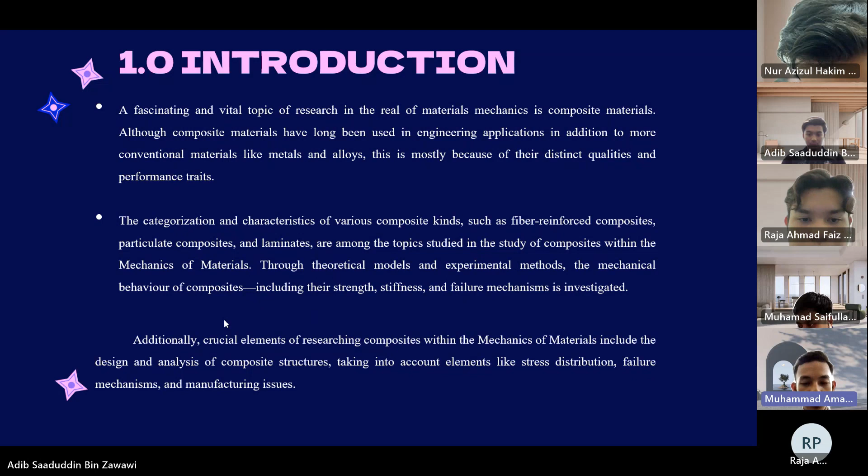Okay, next about importance of composite. Composite material have gained importance in the field of construction of various structures. Numerous benefits of the material, especially strength to weight ratio, meaning they can provide significant strength and stiffness while being lightweight.

Number two, durability and corrosion resistance, which is composite material are highly resistant to environmental degradation, including corrosion, which is a major concern for traditional material like steel. Number three, design flexibility, which is composite material offer a higher degree of design flexibility, allowing engineers to create complex shapes and structures that are not easily achievable with conventional material.

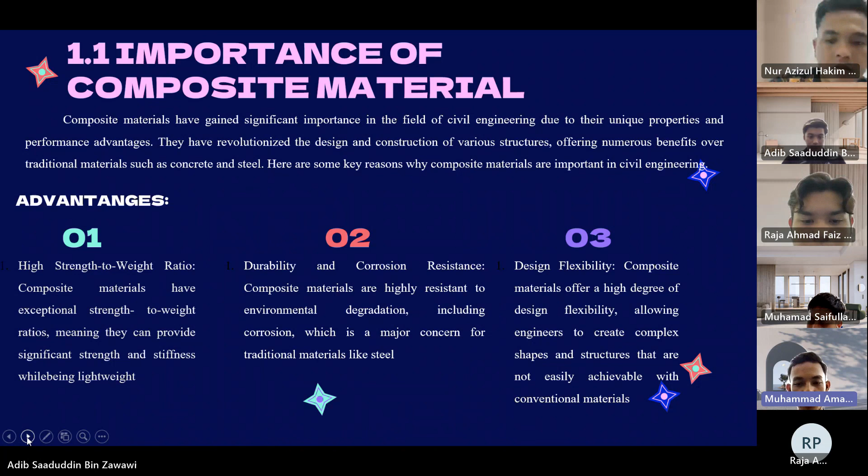For application of composite material in civil engineering, composite materials are revolutionizing the design and construction of structures, offering enhanced strength, durability, and a number of other benefits. This essay explores the diverse application of composite material in civil engineering, highlighting their contribution to the industry.

So number one, reinforced concrete structure. One of the primary applications of composite material in civil engineering is in the reinforcement of concrete structures. Number two, bridge construction. Composite materials have found widespread use in construction of bridges. CFRP composites are employed to strengthen and rehabilitate existing concrete or steel bridges, effectively increasing their load carrying capacity and extending their service life.

So number three, noise barrier wall. Composite material including polymer-based composite and cementitious composite are used in the construction of noise barrier walls along highways and railways. This material offers excellent sound insulation properties, durability, and resistance to the weather.

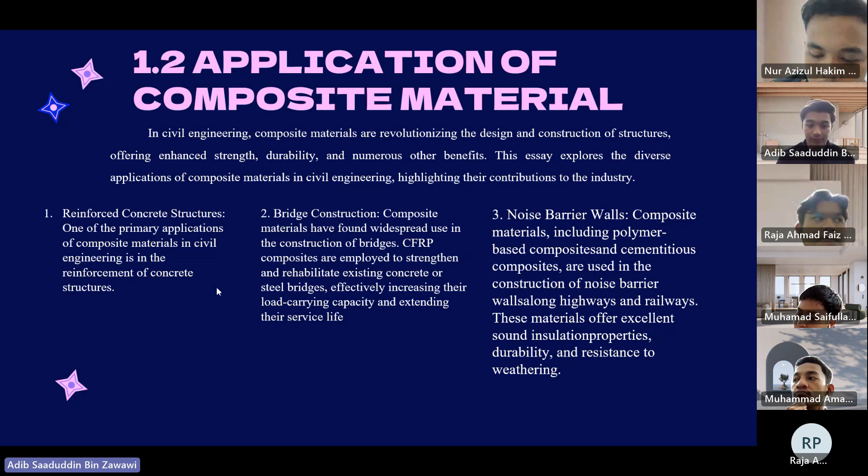Okay, so for the problem statement: design and fabricate a composite plate using any recycled material comprising more than 8 ply or 8 layers, as the term composite material describes. The composite plate should comprise more than 2 types of material, any material ranging from wood piece, natural fiber, used cloth. Thickness of the composite plate should not be larger than 2 mm.

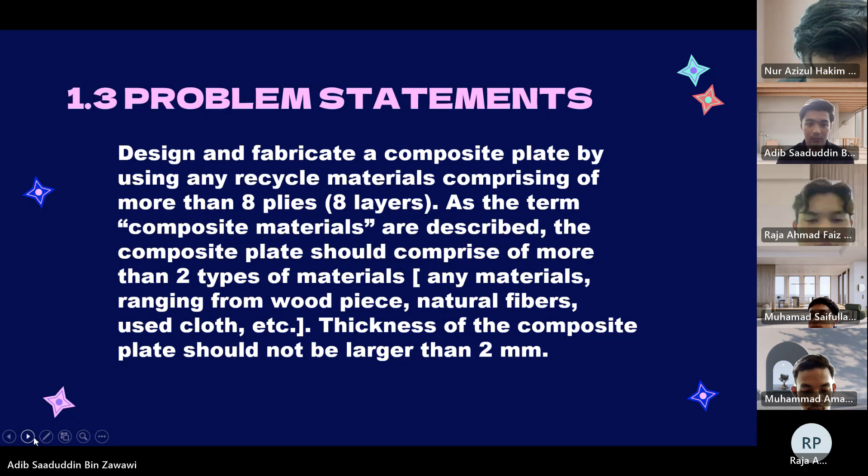Okay, for the methodology, first we use aluminium as the first material, a chemical element with atomic number 13 and symbol Al. Aluminium belongs to the boron group. By weight, it makes up around 8% of the solid surface of the earth. Because of how chemically reactive aluminium metal is, natural examples are uncommon and only found in extreme reducing settings. Instead, it can be found in over 270 distinct minerals in combination.

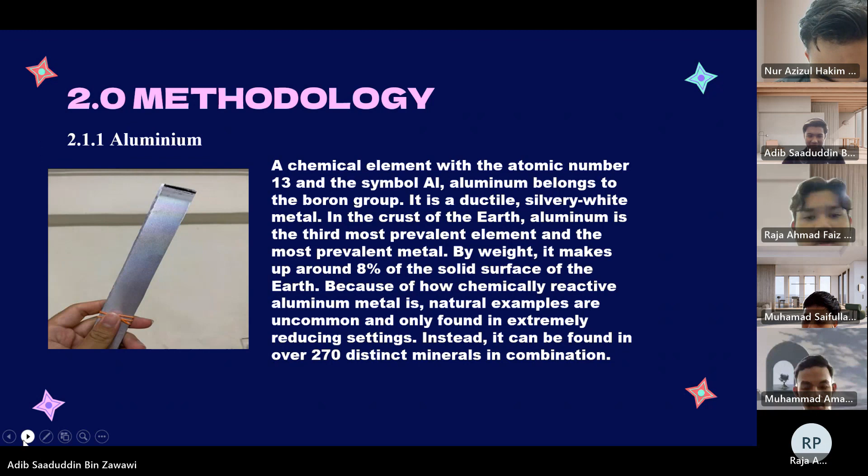For the second material, we use zinc, a metallic chemical element with symbol Zn and atomic number 30. Spelter is another name for zinc used in trade. Additionally, zinc and magnesium are chemically related in various ways. Zinc, on the other hand, gives good corrosion resistance, particularly against rain. Zinc has similar stiffness and elastic modulus properties as other die-castable materials.

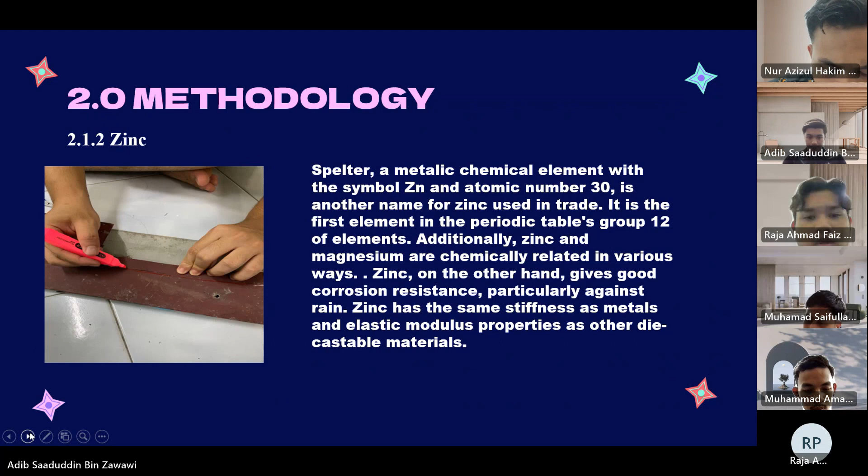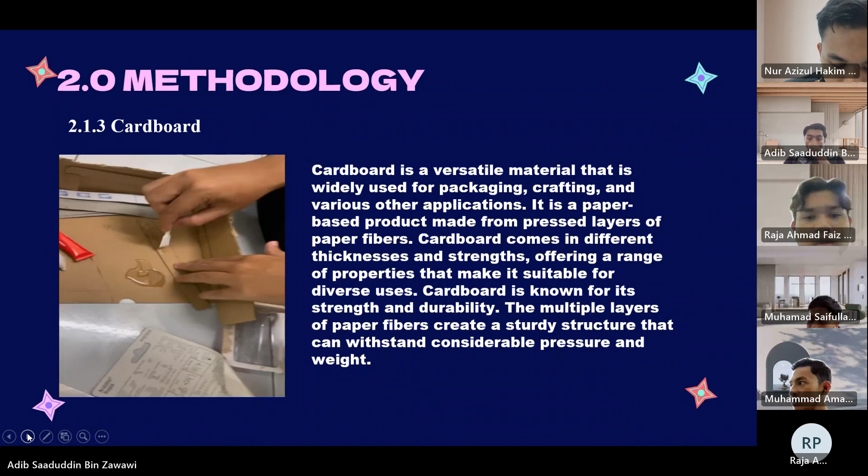For the third material, we use cardboard. Cardboard is a versatile material that is widely used for packaging, crafting, and various other applications. It is a paper-based product made from pressed layers of paper fiber. Cardboard is known for its strength and durability. The multiple layers of paper fiber create a sturdy structure that can withstand considerable pressure and weight.

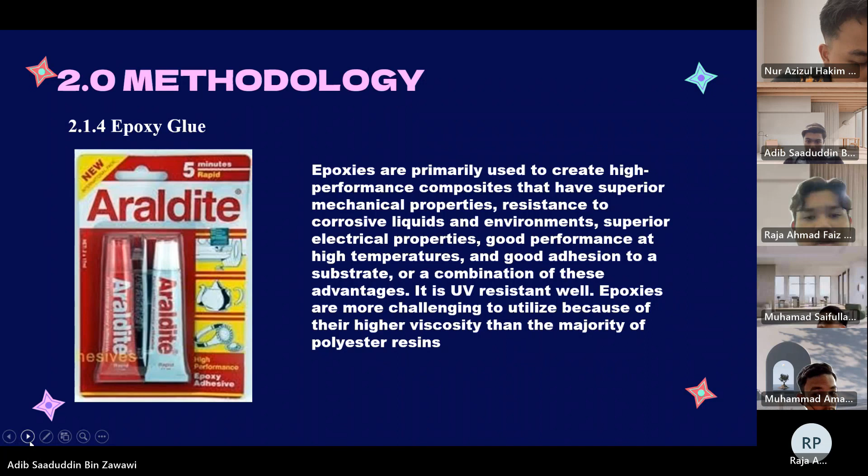For the epoxy glue, epoxies are primarily used to create high-performance composites that have superior mechanical properties, resistance to corrosive liquids and environments, superior electrical properties, good performance at high temperatures, and good adhesion to substrate, or a combination of these advantages. Epoxies are more challenging to utilize because of their higher viscosity than the majority of polyester resin.

E modulus on stress and strain graph. Young modulus, also called elasticity modulus, is a measure of the elasticity or extension limit of a material. It is a mechanical property of solid and linear elastic solid materials.

Using Excel, the data from the laboratory will be inserted and the graph will be plotted. The value of the modulus of elasticity is determined by finding the slope of the curve using the linear equation Y equals mx plus c, where m equals slope.

Tensile specimen size according to ASTM D638. For the tensile test, the specimen size is length 20 cm, multiplied by width 2 cm, multiplied by thickness 2 cm.

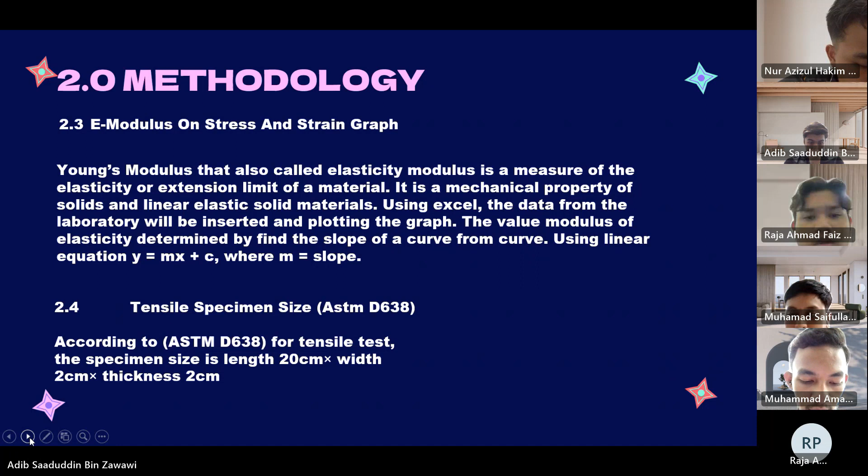For the tensile test procedure, the specimen was placed in the grip of the universal testing machine at a specified grip separation and pulled until failure. The steps for this testing are mentioned below.

First, the computer of the universal testing machine is switched on. Second, a new file is opened in the related software. Third, the specimen is locked tightly between the grips. Fourth, the control panel is set according to size and speed. Then the testing is started.

Fifth, the specimen is applied with an extensive load until the specimen fails. Finally, the result of the testing is recorded in the computer.

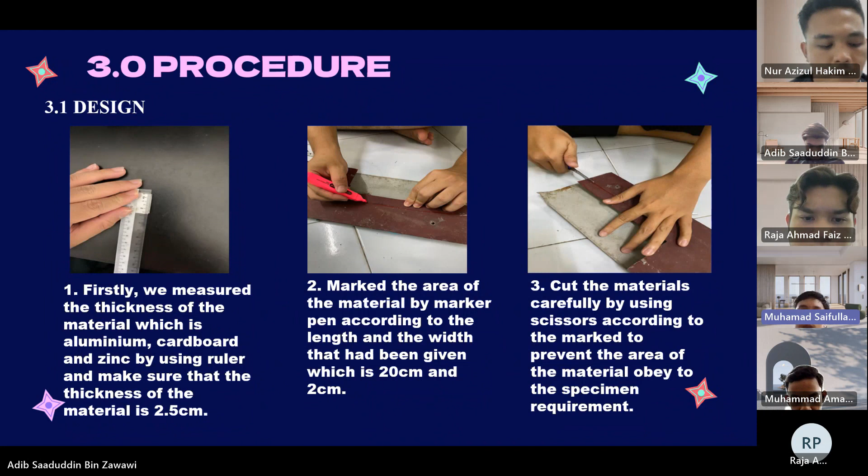For the procedure, first we must take the measure of all our items to make sure none of the layers measure more than 2.5 cm. Then we mark the area that we want to cut, which is 20 cm long and 2 cm wide, and then we cut the material using scissors.

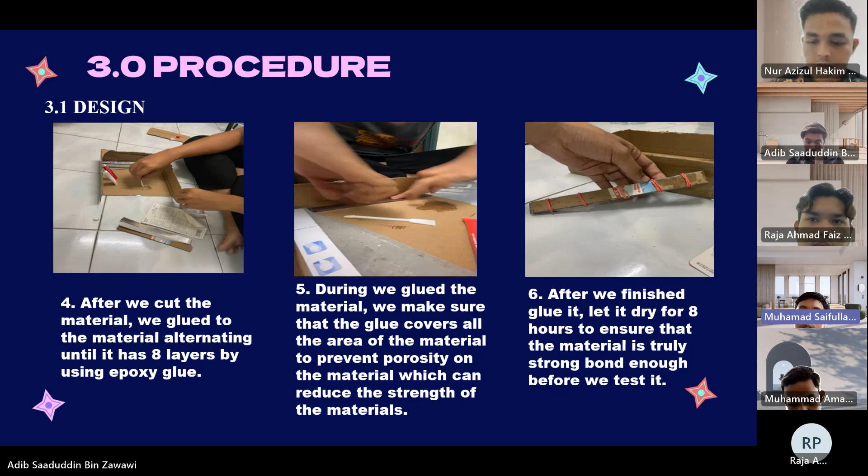Using the glue, we make sure all sides of the material are covered. After we finish, we let it dry to make sure the material forms a strong bond.

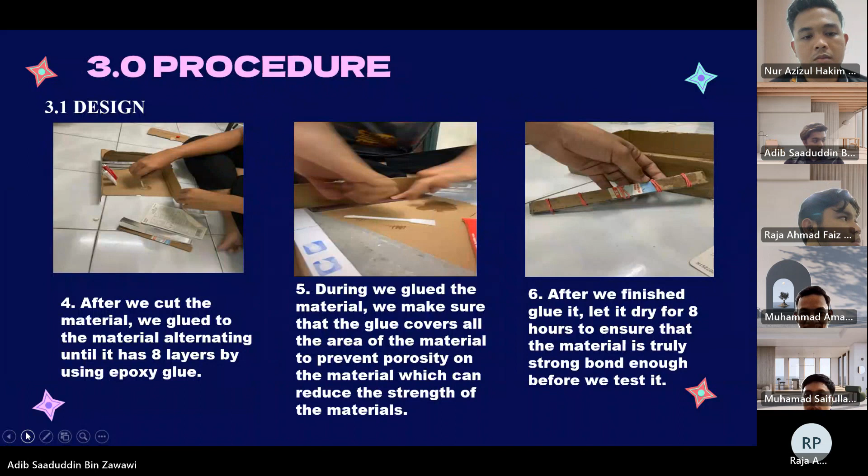Now I will continue with the discussion part of our project. By testing our composite plate in the laboratory, we can determine the elasticity value, the Y modulus, on the stress and strain graph by plotting the data into Excel.

We can simply determine the Y modulus by referring to the linear equation Y equals mx plus c, where we can determine the slope, meaning the m value is equal to the slope of the graph. So the slope is also the value of the Y modulus.

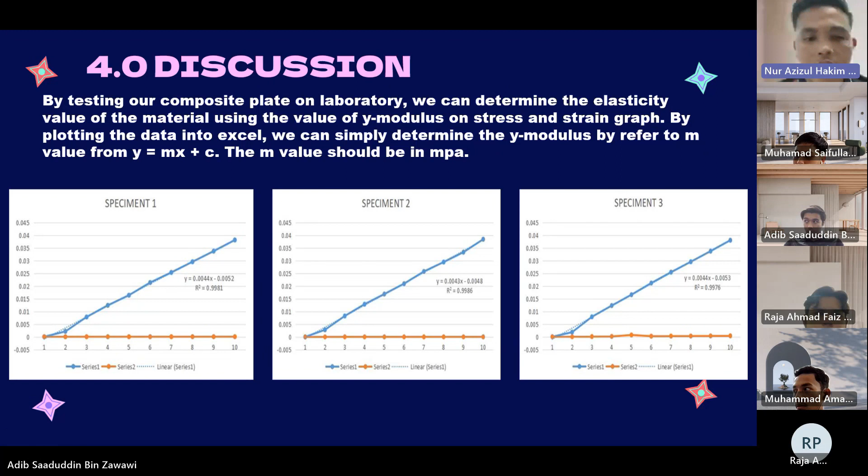You can see specimen 1 has a Y modulus of 0.004 megapascal, for specimen 2 and specimen 3 the R value is nearly equal to 1, so this slope can be measured as the Y modulus.

For this data, we only inserted 10 points because there are certain points we couldn't load from the laboratory data, so it cannot be defined precisely for the Y modulus. We only got for specimen 1, 0.0044 megapascal, specimen 2, 0.0043 megapascal, and specimen 3, same as specimen 1, 0.0044 megapascal.

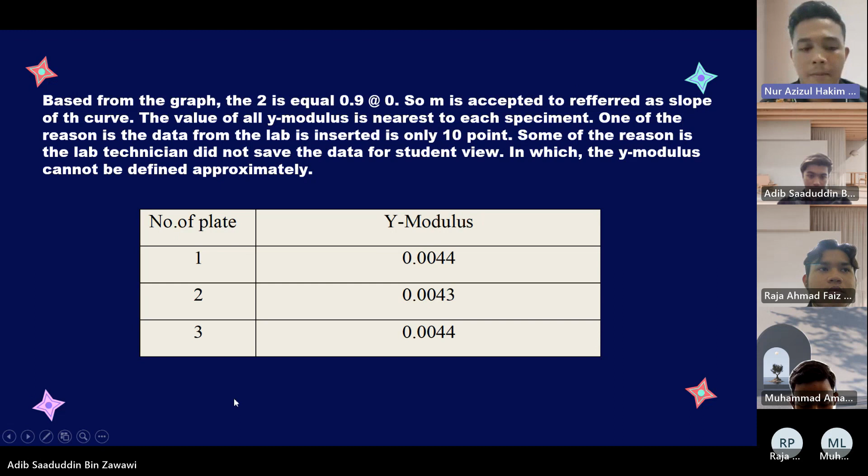We assume this is an effect of the bad condition of the material, since we put the composite material into this project. The maximum stress for specimen 3 is only 12.1 MPa, which cannot be used for this project, so it will be rejected. However, we only take the values from plate number 1 and 2.